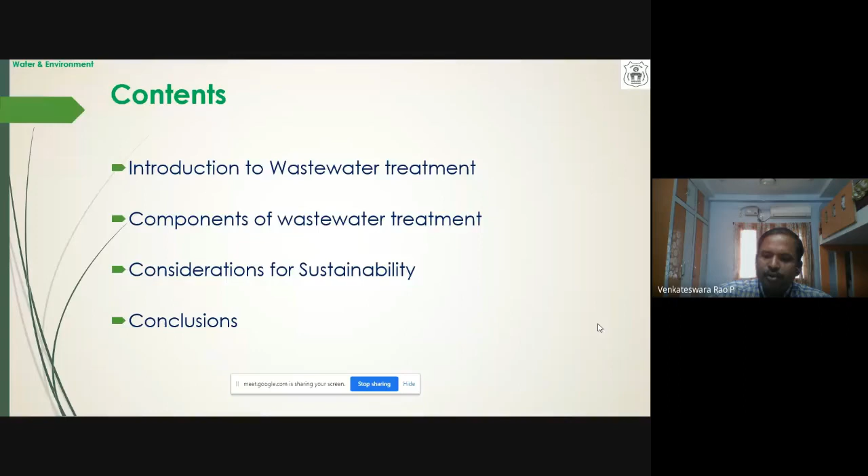Now, having these impurities in wastewater, our philosophy for wastewater treatment is to remove these various contaminants. They may be present in different phases - dissolved, suspended, or colloidal. In any form they can be present. These contaminants present in wastewater, which can also be called sewage,

are treated so as to produce an effluent and sludge. I am calling something effluent, and something sludge, because this wastewater, as I told you, has impurities. The fraction of impurities in fresh wastewater will be around 0.02%, approximately 99.9% being water.

99.9% is water, 0.1 to 0.01% will be solids. The impurities present in wastewater are to the tune of 0.1 to 0.01%. Because of this very small fraction present in wastewater, it poses a threat to the society and a threat to the environment if disposed of without imparting proper treatment.

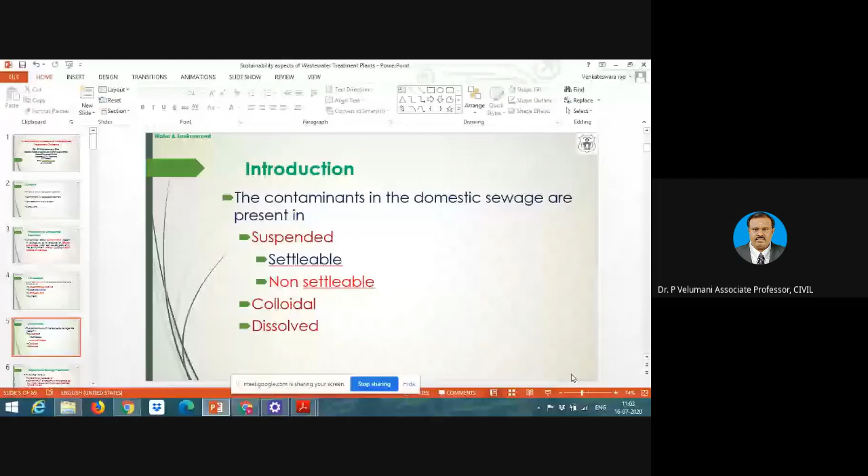Okay, Dr. Velumani, are you able to see now? Yes sir, yes sir, it's visible. Any disturbance in my voice? No sir, it was clear. Okay, good.

We want to use principles that follow nature's principles so they use less resources and become sustainable. Now, the fraction which cannot be removed even by using gravitational force is called non-settleable. This non-settleable fraction refers to colloidal or dissolved matter, which can also be removed using appropriate principles.

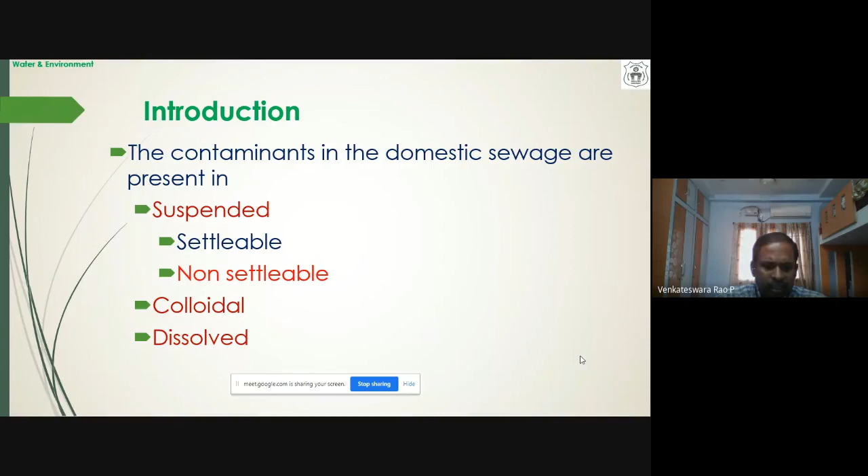I'll be talking about this. We discussed what are the different forms of impurities and in which phase they are present. Now, to remove these impurities, we'll be having a combination of unit operations and unit processes.

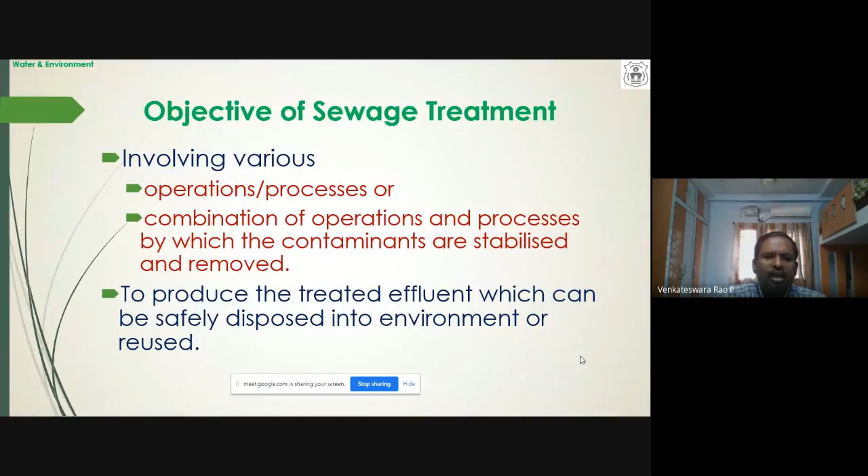I'm using a different word here, unit operations. The unit operations basically refer to the use of physical forces which can be used such that the targeted contaminant is removed. So whenever I talk about unit operation, it always refers to applying some sort of physical force, for example gravitational force, centrifugal force, or physical straining. These are the examples. Next is unit processes.

Unit processes means these can bring changes in chemical composition or biological composition. Chemical composition means, for example, there is biodegradable organic matter, which is a complex organic matter with long chain carbon molecules. These long chain carbon molecules are oxidized into CO2 plus H2O, plus a little nitrogen and some energy in the form of heat. These are the end products. If I get that conversion, I can call it a unit process.

In the process of converting the long chain carbon molecules into CO2, I also end up producing several microorganisms. That is called biosynthesis, also called microbial synthesis. There we are bringing change in the quantity of microorganisms, which is why it is called a biological unit process.

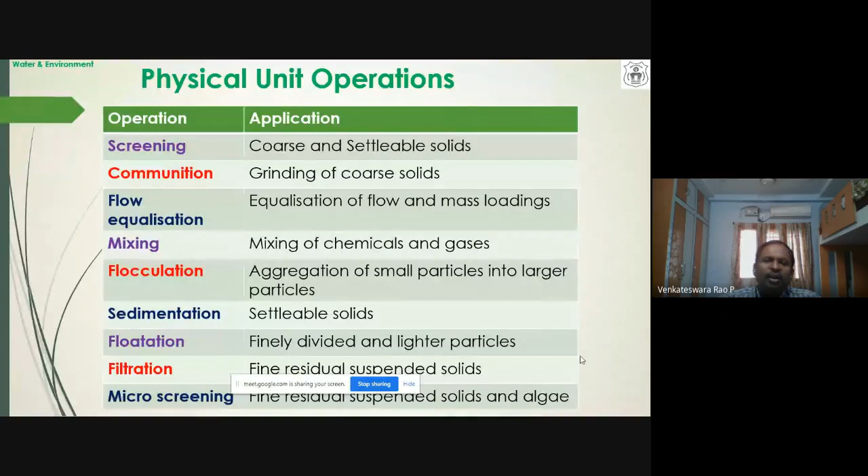Now coming to physical unit operations, there are different operations. Whatever I am discussing now does not mean that all processes or operations are used in all sewage treatment plants. Based on the investment, area available, type of wastewater, type of treated water quality required, the social acceptability, and the economical level of the people who are ready to pay taxes for the systems, we design such systems and accordingly make these components available.

Now coming to chemical unit processes, one is chemical precipitation, which you already know—removal of phosphorus or enhancement of suspended solids removal in primary sedimentation is an example of chemical precipitation. Gas transfer refers to addition and removal of gases.

Example, aeration in aeration tanks refers to gas transfer. Or even applying chlorine gas for disinfection refers to gas transfer.

Next is adsorption. This is for organics not removed by conventional, chemical, and biological methods. For example, volatile organic compounds cannot be removed even by a simple activated sludge process or secondary biological treatment systems, so we use adsorption systems as part of tertiary treatment to remove some of these type of chemicals.

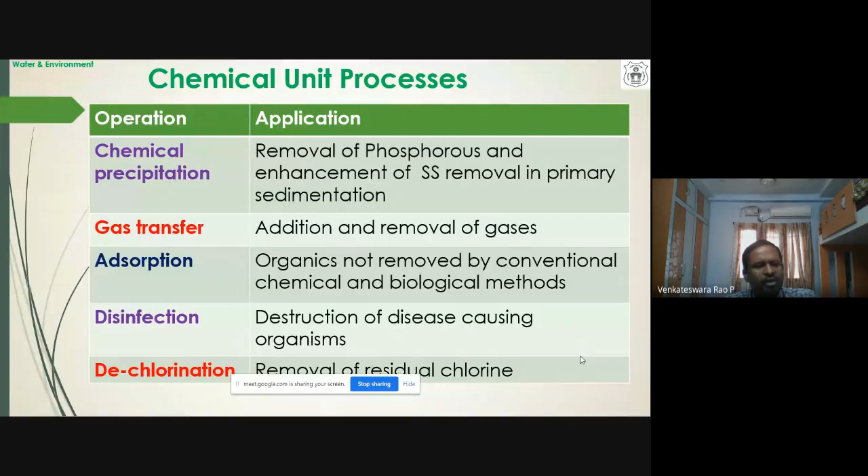Next is dechlorination, because during disinfection we apply chlorine, and to remove this excess chlorine—otherwise this excess chlorine causes other health effects—we want to remove it. This process is called dechlorination, which basically refers to removal of excess chlorine.

Now coming to various biological unit processes, we can classify them as aerobic, anaerobic, and anoxic processes based on the type of fundamental mechanism being used, which is also called the metabolic pathway. Metabolic pathway means the chain of chemical or biological reactions expected to remove the majority fraction of impurities from a given batch of wastewater.

So if oxygen supply is plentifully available, and the long chain carbon molecules, organic matter, is simply converted into CO2 plus H2O, we call it an aerobic system. This type of degradation happens in the presence of aerobic microorganisms, that's why these are called aerobic systems.

Aerobic systems, anaerobic systems, anoxic systems—these three are available. Aerobic and anaerobic systems are capable of doing the same job, but use two different types of microorganisms. Now we have a choice to use aerobic organisms or anaerobic organisms. Both systems have their own pros and cons.

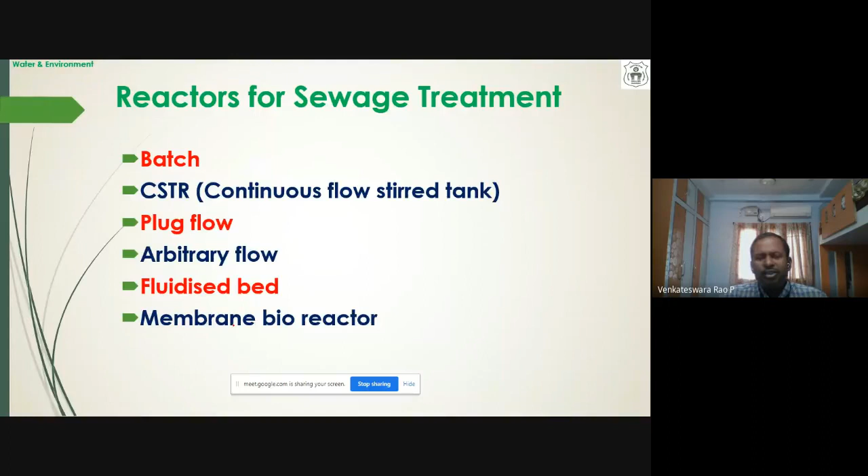So those types of reactors have different classes. We have batch reactor, CSTR, plug flow reactor, arbitrary flow reactor, fluidized bed reactor, and membrane bioreactor. I will not explain all these reactors in my talk right now, but some of these, wherever available, I will mention in my slides with figures, telling you the type of reactor and in which systems they are being used.

Now, having these reactors in my hand, if I want to remove these impurities, as I mentioned earlier, I will be doing this in a phase-wise manner. So the first phase is called preliminary treatment. Second phase is primary treatment, then secondary treatment, and tertiary treatment. Sometimes preliminary and primary together are called primary treatment.

The purpose of the preliminary and primary treatment is to remove the large suspended organic solids. Particularly, the preliminary treatment objective is to remove all floating matter as well as heavy settlable inorganic matter. If I am using only preliminary treatment specifically, that includes heavy settlable inorganic solids.

Someone may ask me, sir, what is the problem in removing all settlable solids together? When I talk about all settlable solids, that includes inorganic settlable, organic settlable, and inert settlable matter. Can somebody tell me what is the problem in removing the whole settlable solids at a time? If you devise a mechanism or a reactor such that all the settlable matter is removed together, is there any problem? Can somebody tell?

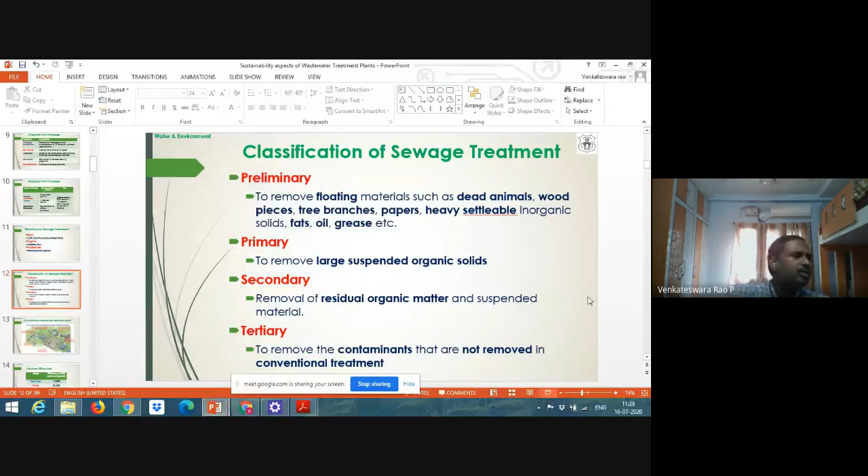Okay, now coming to this. So I told about preliminary and primary. Now coming to secondary. Preliminary and primary mostly use physical forces, which I can call physical unit operations, or simply unit operations.

Unit operations use very less energy or resources to remove impurities. Whatever I can easily remove, in a sewage treatment plant, I call quick wins, meaning whatever can be done immediately. That is called primary treatment. The primary or preliminary treatment refers to quick wins, things I can quickly remove using physical forces, which does not consume much resources.

Now, after this easy removal, the remaining matter in the wastewater is tough to remove using physical forces. The remaining organic matter, present in dissolved or colloidal phase, can be removed using secondary treatment. After secondary treatment, we also remove the bioflocs that is formed. That removal of bioflocs is also called secondary treatment.

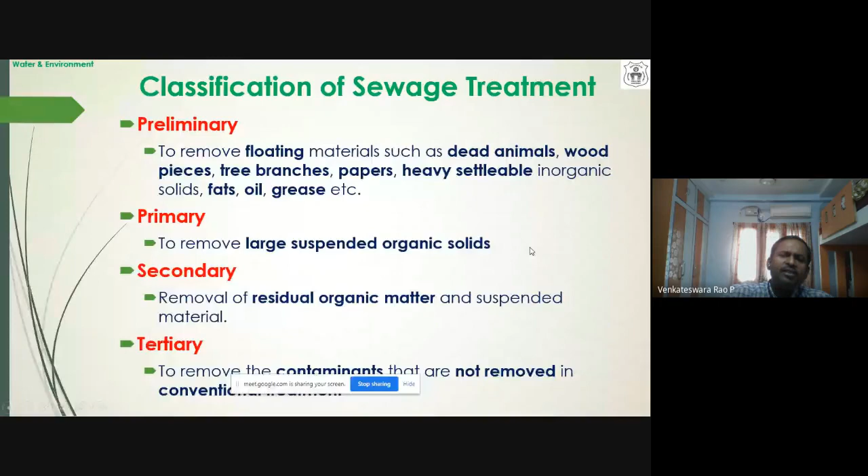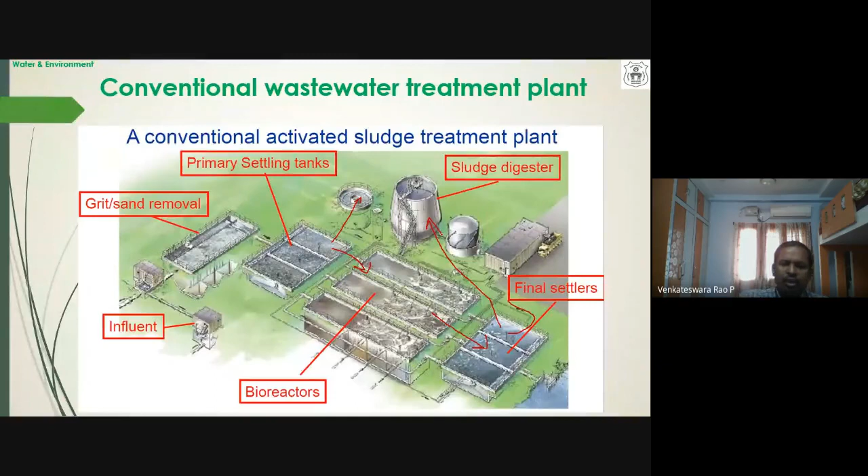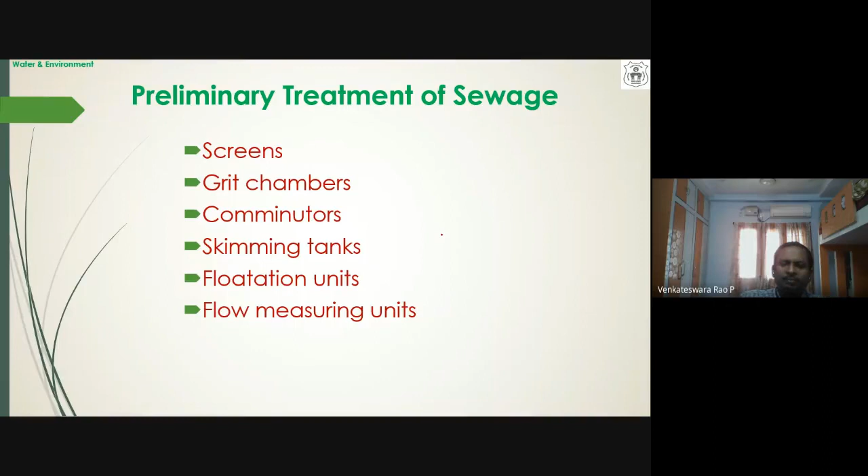The preliminary treatment of sewage has several options like screens, grit chamber, comminutor, skimming tanks, flotation units, and flow measurement units. Most of these I explained earlier. For preliminary treatment, floating materials which consume approximately 5 to 10% of BOD are removed using coarse and fine screens. Heavy settleable inorganic solids are removed using grit chambers, accounting for around 10 to 20%, and fats and greases can be removed using flotation skimming tanks. This may not be the case in most domestic treatment plants, but particularly for wastewater from kitchens, dining halls, or community halls, this applies.

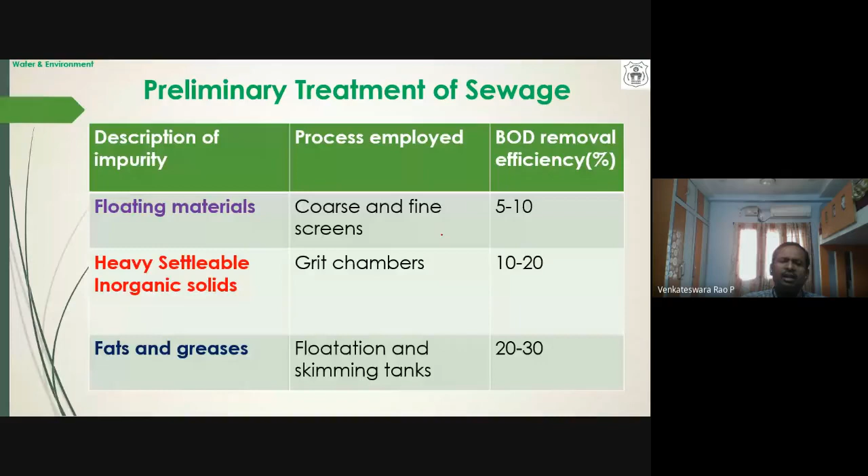Primary treatment of sewage is expected to remove large suspended organic matter, which we can do using aerobic or anaerobic systems, and plain sedimentation tanks. For example, septic tanks and Imhoff tanks have only one system, but conventional municipal wastewater treatment units have several unit operations and processes happening in different units. Septic tanks and Imhoff tanks don't have many units, but are very simple constructions capable of removing various impurities at different stages within one physical unit. That's why these are also mentioned here.

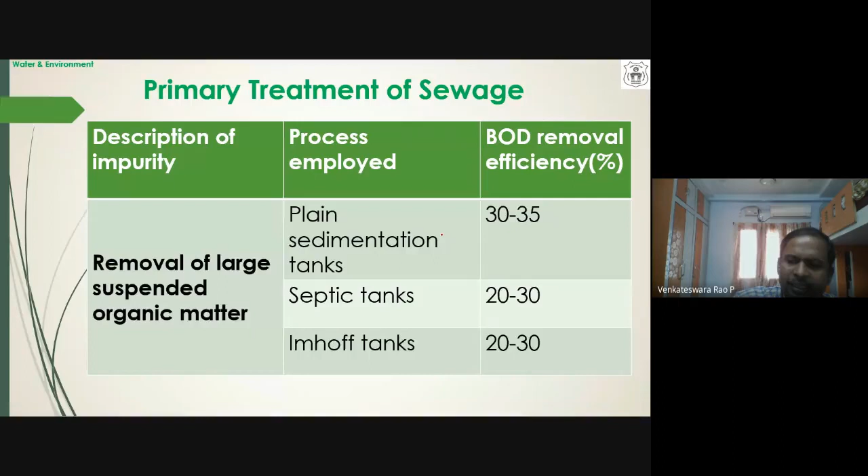Secondary treatment of sewage is expected to remove fine suspended solids and dissolved organic matter that is biodegradable in nature. Majorly we employ either the activated sludge process, and trickling filter as an older system, but now it is almost obsolete - nobody uses it because of operational problems and ponding problems. People are going for the activated sludge process or oxidation ponds, often used in combination. There are many modifications to the activated sludge process, which I will discuss in my next lecture.

Tertiary treatment of sewage includes chemical clarification, filtration, adsorption, disinfection, nitrogen removal, phosphorus removal, and demineralization. All these processes are self-explanatory.

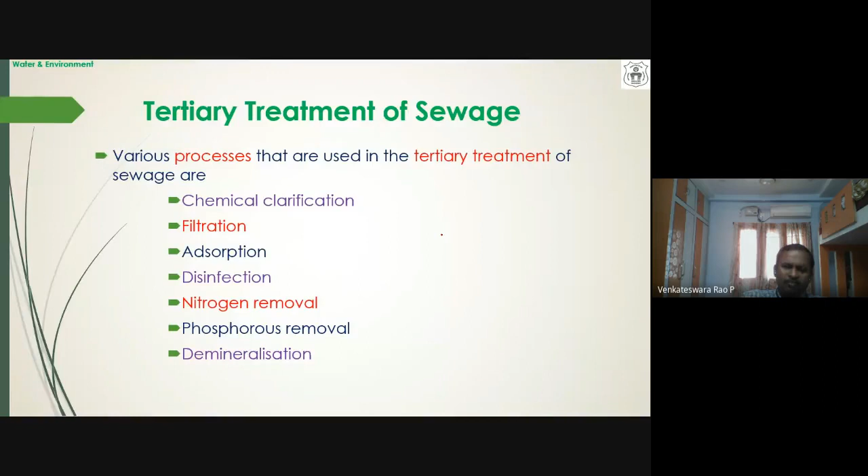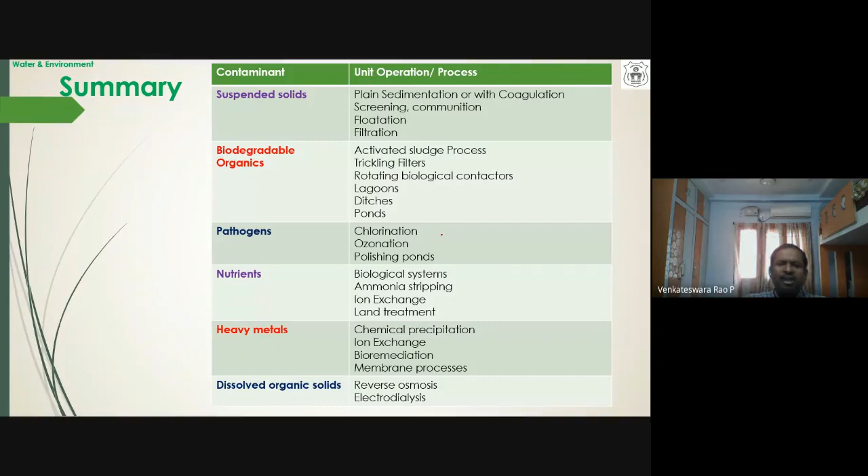Now going back to this summary sheet, which talks about impurities and the possibilities - the different methods and mechanisms available to remove these contaminants. For example, for suspended solids, I have four choices: plain sedimentation with or without coagulation, screening, comminution, flotation, or filtration. How many of them I use depends on the range and scale of impurities, as well as money available, capital cost, operational cost, total layout of the treatment plant, area available, and the required treated water quality. Accordingly, I use either one or a combination of these units to remove these impurities.

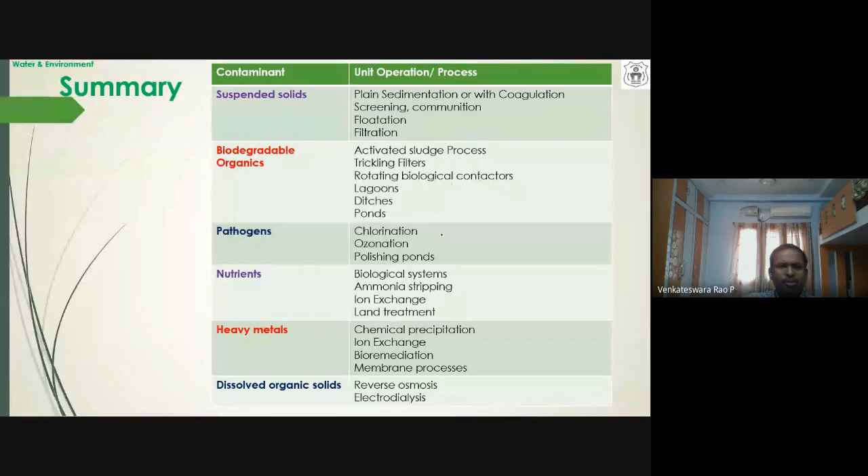That is the summary of my first part of the lecture. Now I'll stop here for a while for any questions you have. If you don't have any questions, we'll move to the next part. Any questions so far?

Audience, any questions from my first part? As I took a lot of time explaining minute details in the beginning, for the rest of the talk I'll go a little faster. I won't repeat most things, but I'll show figures of the different unit operations and processes, their usage, and sustainability concepts in my subsequent lecture. Any questions so far?

Hello sir, please - regarding flow equalization, can you please explain? Yes, what is your problem regarding flow equalization? What is your question under the physical unit operations, the flow equalization?

Yeah, so it's intended basically for this reason: if you look at how sewage is produced in a day, it is not uniform. Particularly between morning 6 to 9, we produce the largest amount of sewage - those 3 hours account for the maximum production. In the evening too, like 6 to 8, we produce maximum sewage. But our sewage treatment plant is generally designed for 24-hour operation. So if we allow the entire sewage to directly reach the plant without any cushioning, at certain times the units are subjected to high flow, causing some units to not function properly. So we need a mechanism where the flow is stored and pumped to the remaining units in a constant manner. That is why we need flow equalization. Hope I answered your question.

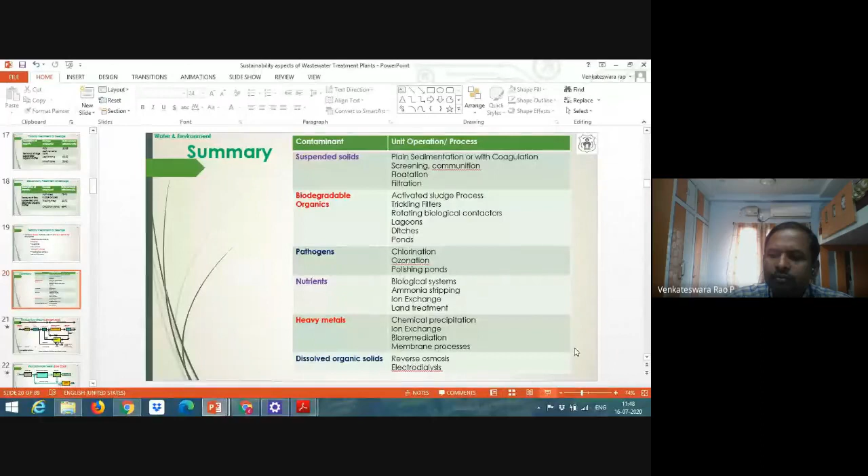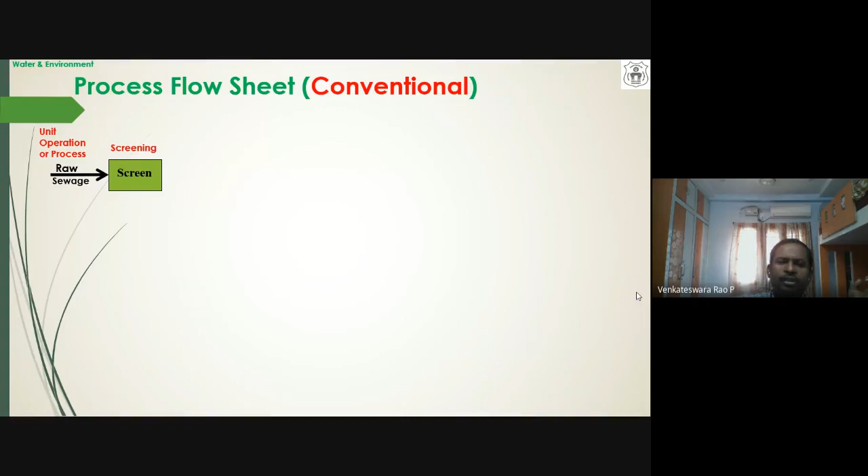Now I have shown you earlier the typical layout. I will be showing the same layout again, revisiting it, showing the different unit operations and processes. What is possible, say for example, as I am talking to you, most of the participants are from Bengaluru. Say you want to design a system for Bengaluru, or for Tumkur, because I have some affinity with Bengaluru since I worked there in 2003-2004, two years, at Ramaiah College, MSRIT. So if you want to design for Tumkur, or maybe Shahabad, Yadgiri, some small towns, or even a small village with 20,000 or 10,000 population, if you want to design systems which are possible and feasible, and how to do it...

Okay, so if you look at my screen now, what I am mentioning at the top here - these are called unit operations or processes. So those I've shown here in the box, as how sewage moves from one unit to another unit. Now going forward...

So sewage enters from raw sewage to screens. Here we remove large floating bodies, then it enters into grit chamber, where I remove heavy suspended settleable matter, grit matter, and then it will remove lighter organic material in the form of dissolved and colloidal matter. Now I get the secondary clarifier, which will remove the bioflocs produced in the reactor. Now the clear effluent is called treated sewage, which I will subject to disinfection and then release into water bodies. Now the sludge obtained from the secondary clarifier is taken and given to the biological reactor. Why? Because the sludge obtained in the secondary clarifier is nothing but active microorganisms, or trained microorganisms.

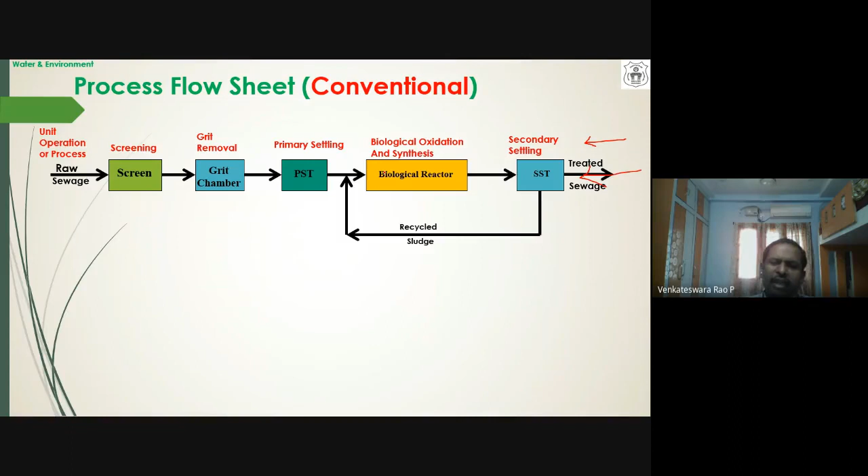So these microorganisms already have enough training to remove the carbonaceous organic matter. So we don't want to simply lose them. We want to increase their population in the biological reactor, which refers to M. Actually, there is something called the F by M ratio - F means food, M means microorganisms. Food means the colloidal or dissolved biodegradable organic matter, whereas the microorganisms present in the reactor refers to M. So for a given quantity of food, if I maintain enough microorganisms, my work can be done much quicker. That's why we recycle the sludge.

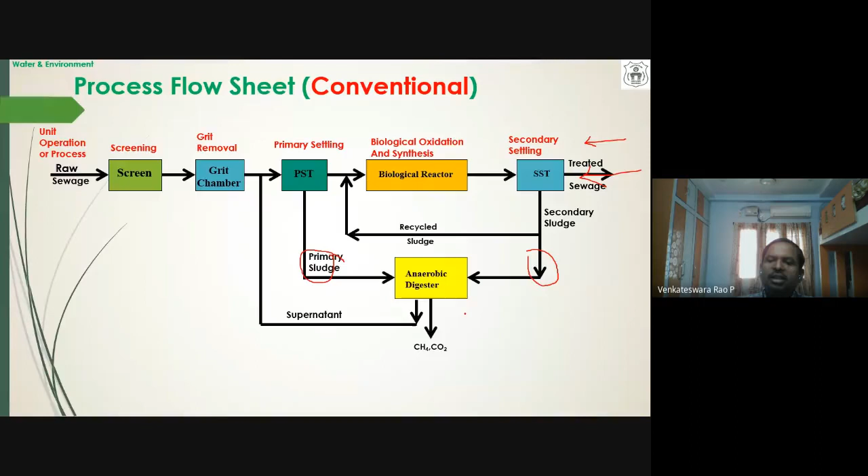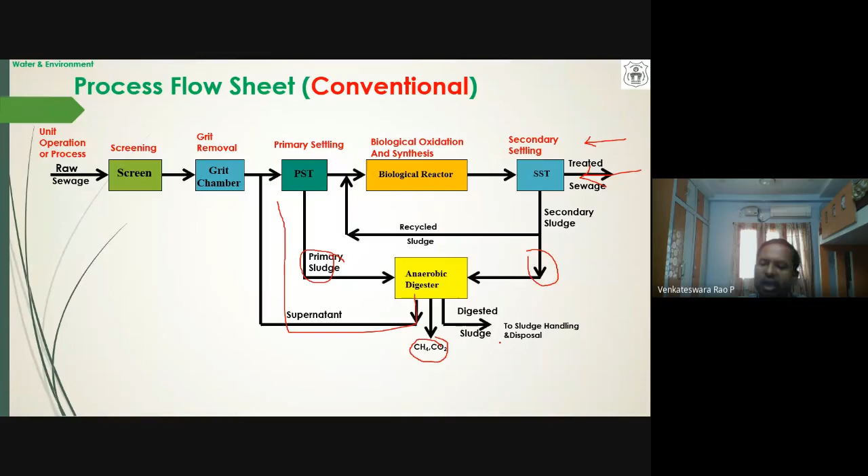And after recycling, a fraction will be excess. So the excess sludge, whatever is clarified, is taken to the anaerobic digester, and sludge from the primary sedimentation tank is also taken to the anaerobic digester. The purpose of this anaerobic digester is to fix the carbon content present, and over a period of time this digester produces methane plus CO2, which is called biogas. After getting energy, once the digestion time is over, I separate the liquid and solids - the liquid is taken back to the beginning of the treatment plant, whereas the solids or digested sludge is taken for dewatering, and finally after dewatering we can dry it and use it as soil manure. So up till here we call it primary treatment, and after that it is called secondary treatment.

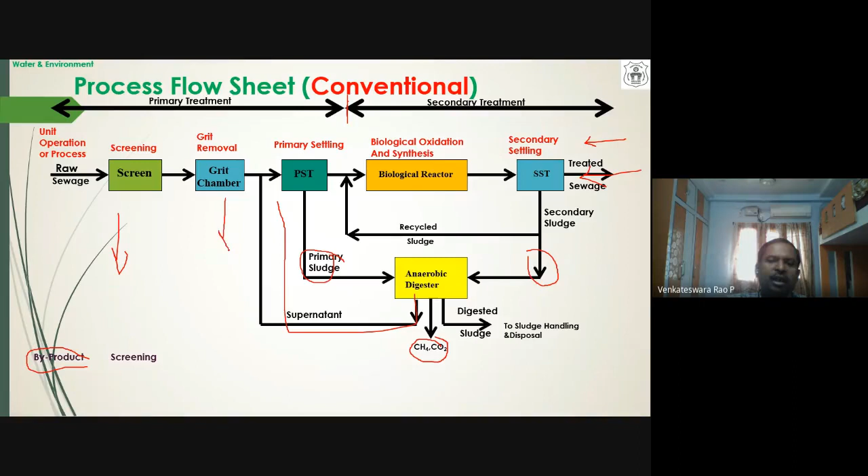Now coming to this process, if I look at the byproducts produced from each stage - from the screen I get screenings, from the grit chamber I get grits, from the primary sedimentation tank I get primary sludge, and from the secondary sedimentation tank I get secondary sludge. So these are my captions. This is the process flow sheet of a conventional sewage treatment plant. Hope it is clear. Any questions here?

So this is called a conventional sewage treatment plant. This is a typical system which can be applied in any major urban agglomeration. The moment we move from urban to semi-urban, where people's paying capacity is less, this is not the system.

If people's paying capacity is less, or land is available cheaper, or energy is not continuously available—because these systems' performance depends mostly on a biological reactor where we have to supply 24 hours of oxygen, meaning 24 hours of electricity, which was once a dream. In olden days, even 10-20 years back, even Indian metros didn't have the freedom of 24 hours power. Now we are blessed with continuous power.

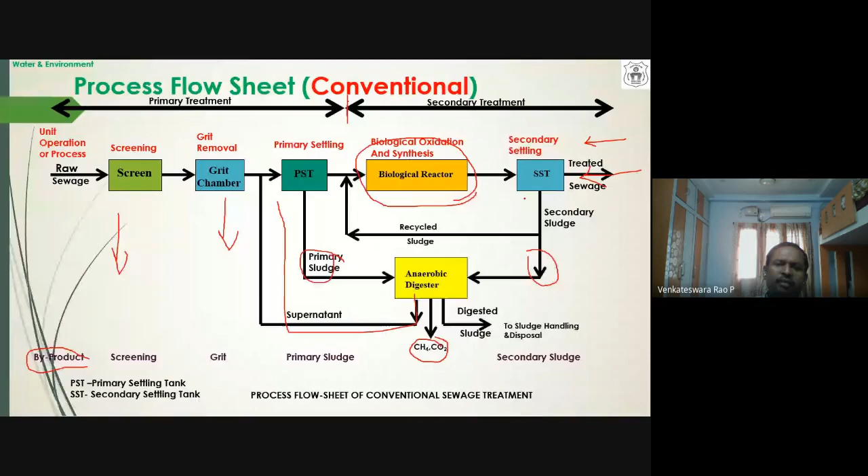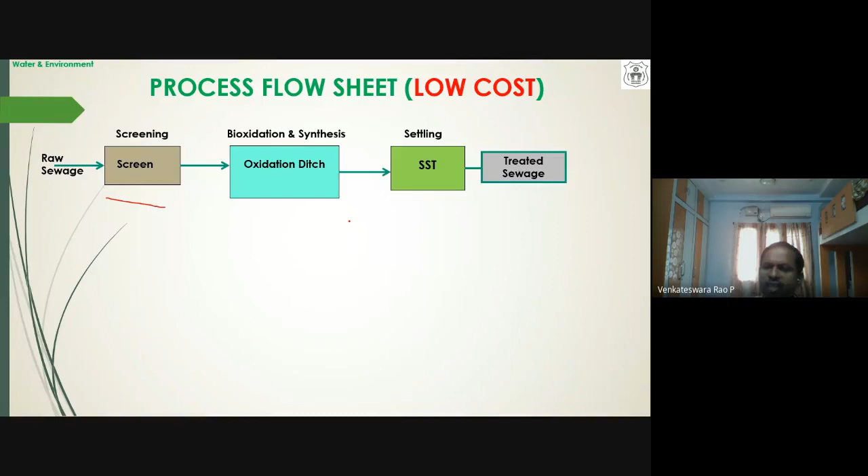But in the absence of continuous power, we have to think of alternate solutions. These conventional systems, now moving to low cost systems—everything is the same, but instead of so much pre-treatment, I'll have simply screens followed by something called an oxidation ditch, and then treated sewage. So everything else is the same; this is called low cost treatment systems. What is an oxidation ditch, how does it look? I'll show a figure later, I have an excellent figure.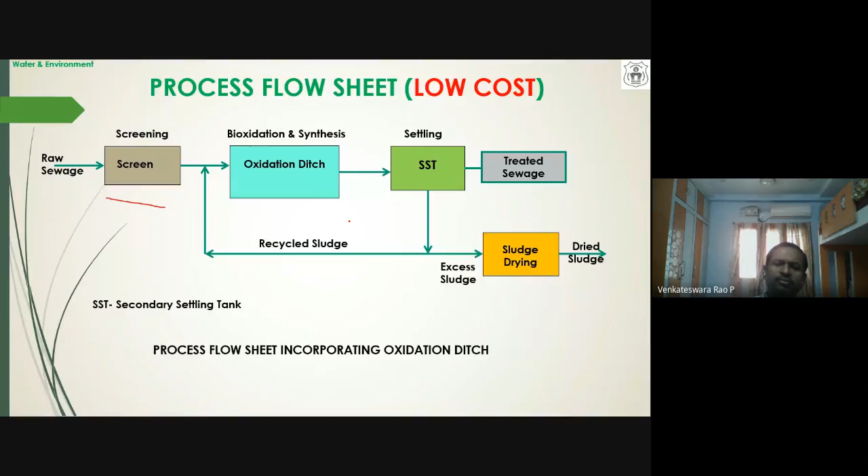Another option, if we don't want an oxidation ditch, we can go for aerated lagoons—I have a figure for that too, I'll show you. I can also have a waste stabilization pond doing the same job. Now you may ask, what's the difference between an aerated lagoon and a waste stabilization pond? An aerated lagoon has an additional aeration device attached to a pond. If that aeration device is removed, such a system is called a waste stabilization pond.

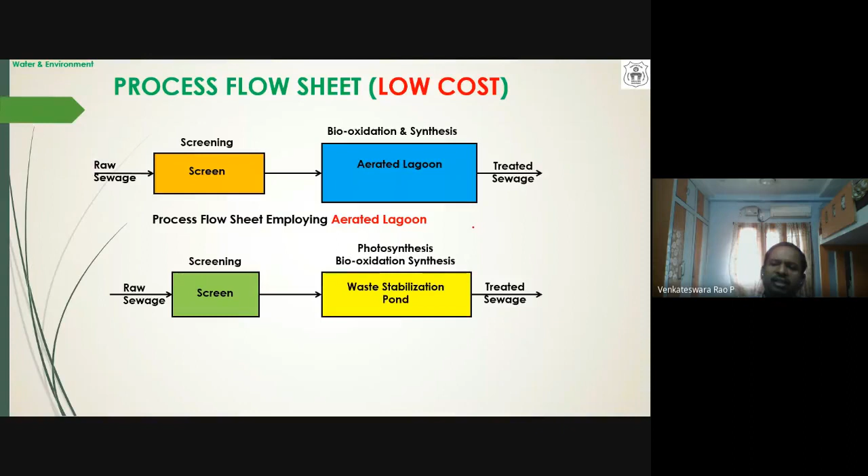This waste stabilization pond itself has different types: aerobic ponds, anoxic ponds, anaerobic ponds. Now all these methods so far, low cost or conventional, work on the principle of aerobic mechanisms. Now if I want to talk about anaerobic systems...

These include anaerobic filters, anaerobic rotating biological contactors, fluidized submerged bed media anaerobic contactors, upflow anaerobic sludge blanket reactors—these are the popular anaerobic reactors. One good thing about anaerobic reactors is they are capable of generating energy, meaning they convert long carbon chains into CH4 plus CO2, called biogas, which can be used for various purposes.

Whereas aerobic systems don't yield usable energy—they also produce energy, but in the form of heat, which we are not able to recover. Very little heat is produced and we cannot recover it. So aerobic systems require less footprint area, while anaerobic systems require more footprint area. Aerobic systems require more additional energy, whereas anaerobic systems require less additional energy.

So basically anaerobic systems require very little energy and are capable of producing more energy, but the problem is they require more capital cost—huge reactors are needed because residence time is much higher. Whereas aerobic systems, since we use more energy to supply oxygen, the treatment process is much faster, so it requires less footprint. As we accelerate the process, aerobic systems also produce large amounts of sludge, whereas anaerobic systems, being much slower, produce less sludge. So these are the differences between aerobic and anaerobic systems.

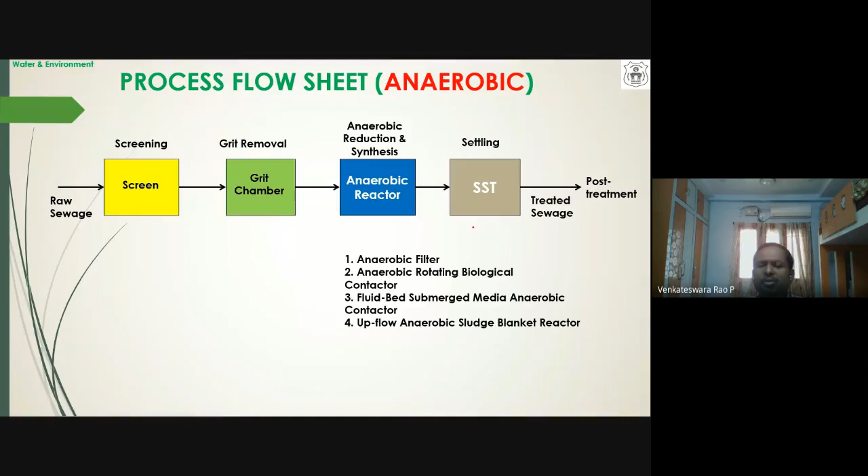Now coming to expected efficiencies—this is self-explanatory, you can just go through it. The types and classification.

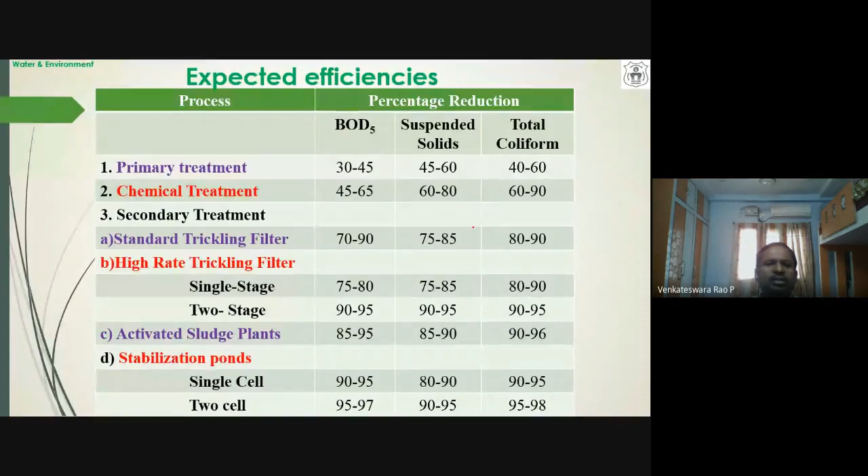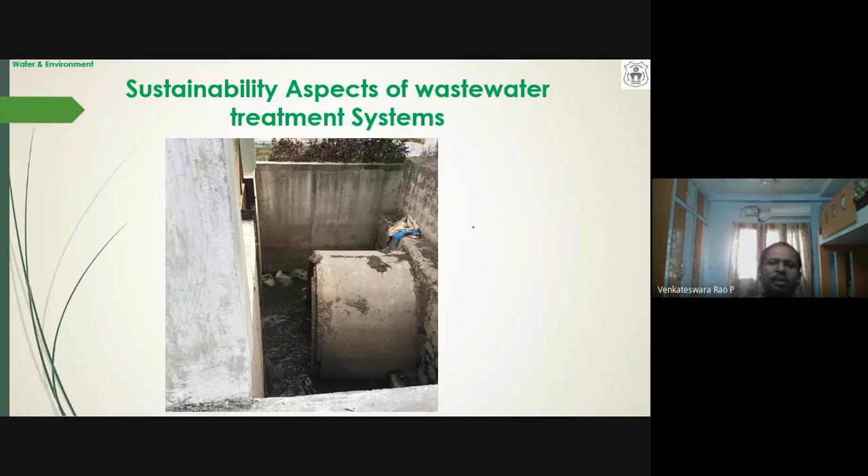Now I am talking about sustainability, having understood the fundamentals of wastewater treatment so far. Let us look at what are the different sustainability aspects of these wastewater treatment systems, whether aerobic or anaerobic. How do you make the system sustainable? What are the different factors one needs to consider? Of course, the essence—when I say sustainability here in wastewater treatment—refers to building blocks to form a structure.

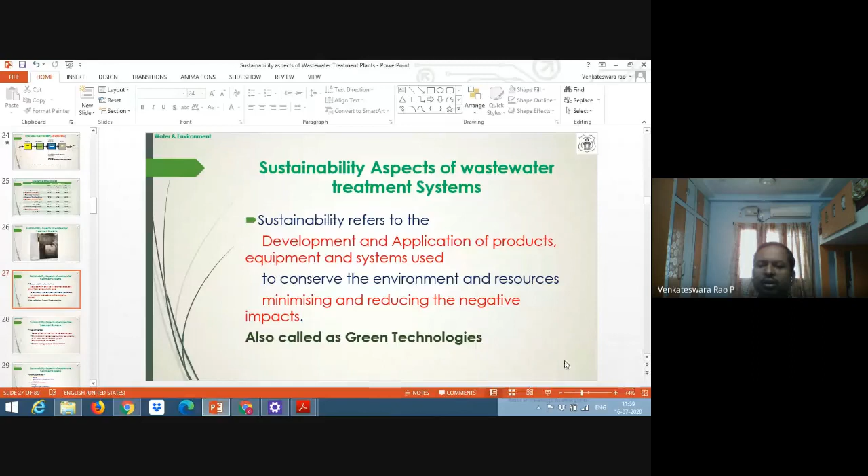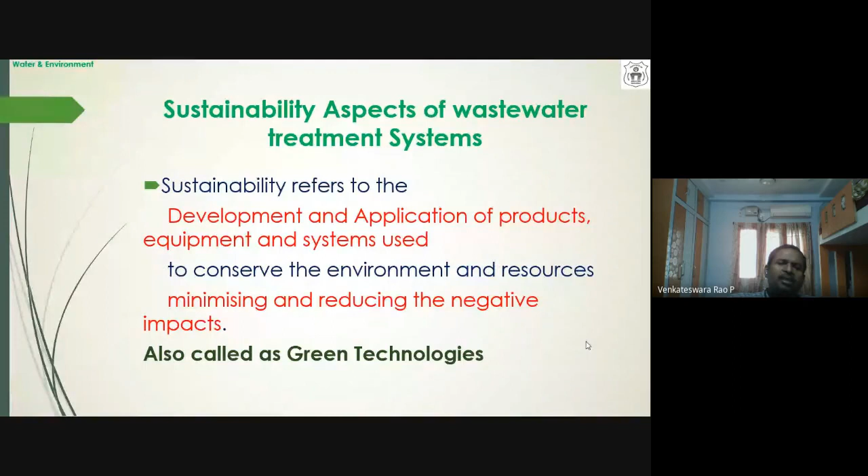So sustainability refers to development and application of products, equipment and systems such that we conserve the environment and resources, minimizing and reducing negative impacts—also called green technologies. Now let us look at what factors we consider to make a treatment system sustainable. These are the different factors, which I can call indicators. One is the economic indicator, like how much capital cost it requires for a system to be implemented.

What are the operation and maintenance costs and what is the user cost?

Coming to environmental indicators, how much energy does the system require, and what is the removal efficiency of these various impurities present in the wastewater, and what is the reuse potential of treated water generated from this treatment system. As part of societal indicators, what is the cultural acceptance, whether it is capable of providing new job opportunities, and what is this treatment system's capability in improving the local environment.

All these factors are called sustainability indicators, based on which we can classify existing systems into a ranking, and then choose an appropriate system with reference to a particular area while deciding what type of treatment layout can be used. So what are the different advantages?

By following sustainability, what we really gain is less effluent to be discharged, and less hazardous effluent in terms of both quantity and quality. These processes are environmentally friendly because of the environmental indicators: consuming less energy, less resources, causing less environmental nuisance, and retaining high quality of environment.

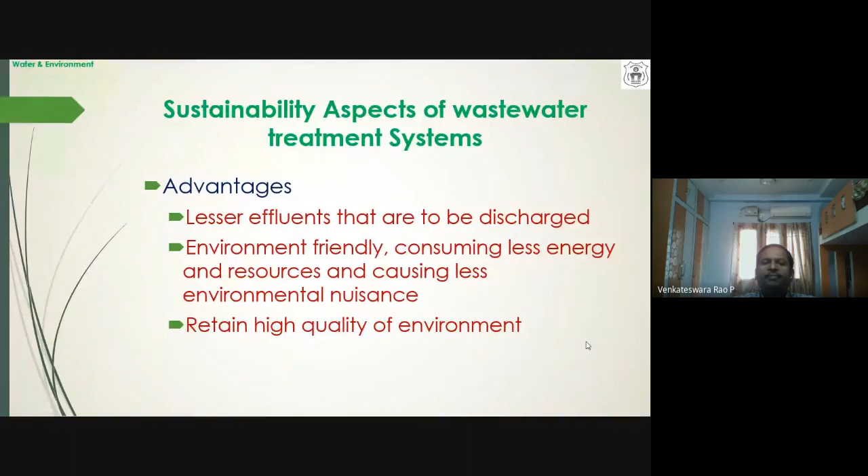Today you must have seen that because of COVID, when there was lockdown, natural systems were healing everywhere across the globe, particularly with the reduction of greenhouse gases and so on.

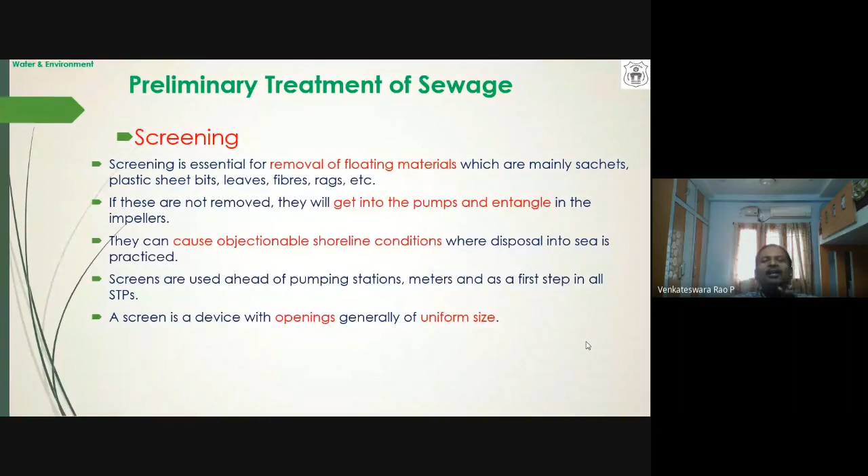Now coming to preliminary treatment of sewage, I am having a screening which I already explained. Now let me show you the different types of screens.

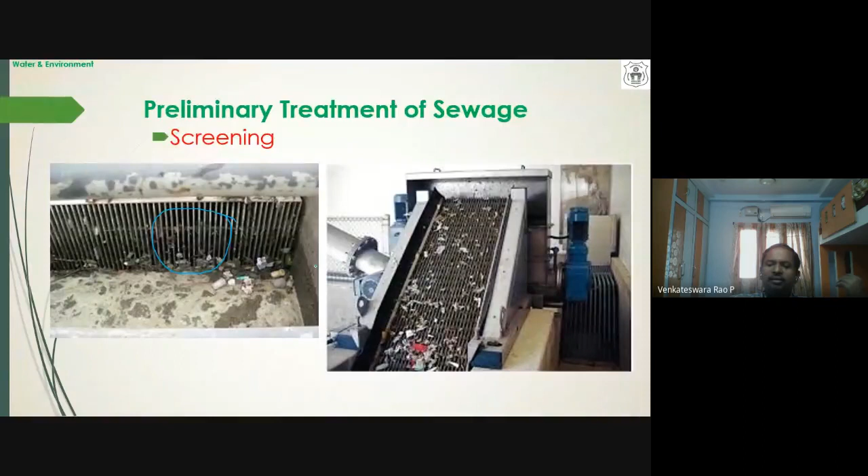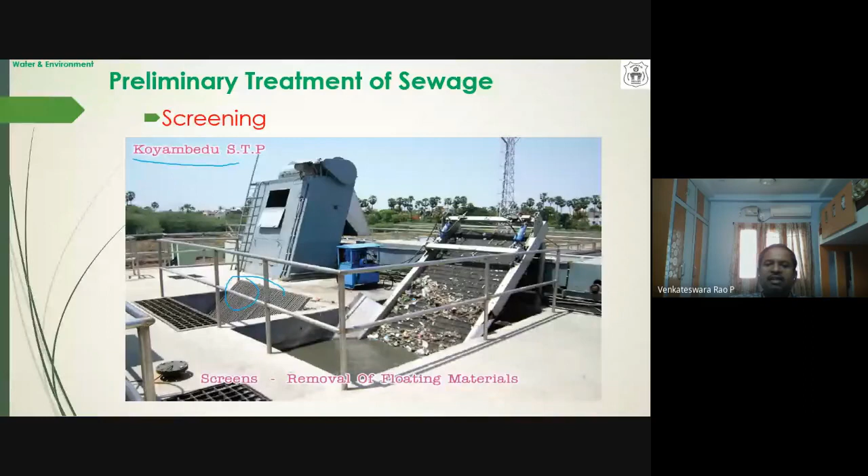This is a photo I took from a Tamil Nadu, Chennai plant, Koyambedu sewage treatment plant, a motorized plant. This is a coarse screen, whereas this is a fine screen, a motorized screen.

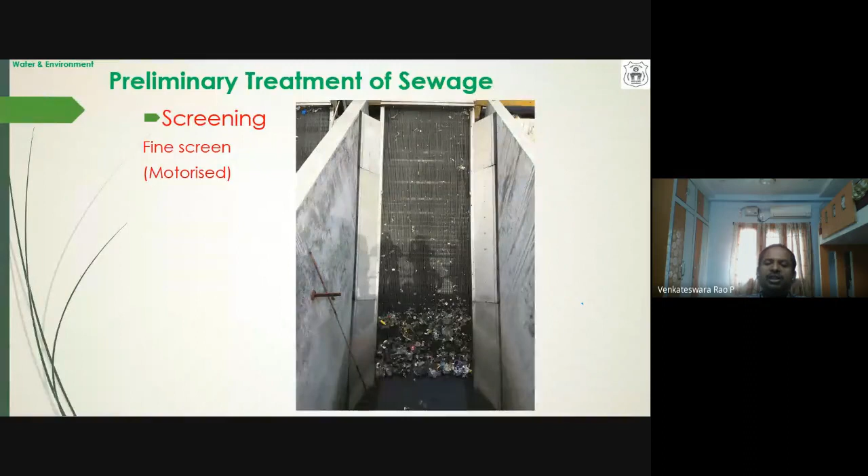This is a mechanical fine screen, a motorized fine screen which moves automatically. This is a manual fine screen, where one can remove the impurities and keep them here. From here it will be lifted and loaded to the garage.

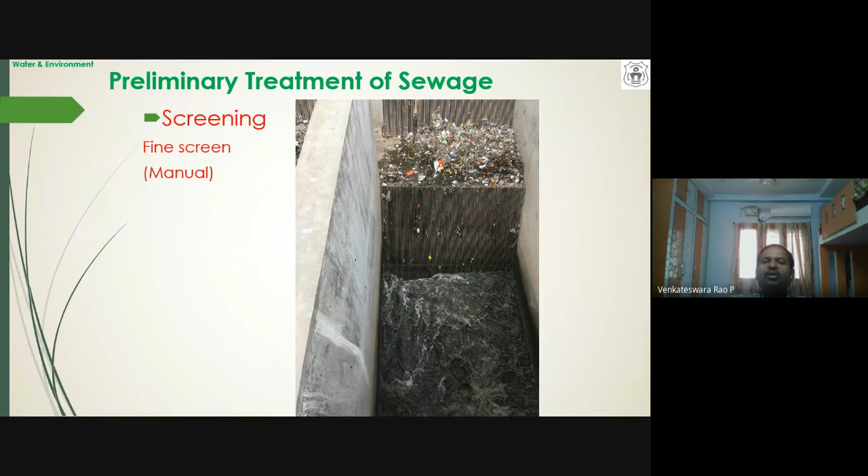And if anybody wants to design a screen, these are the different stages and steps in the design of the screen.

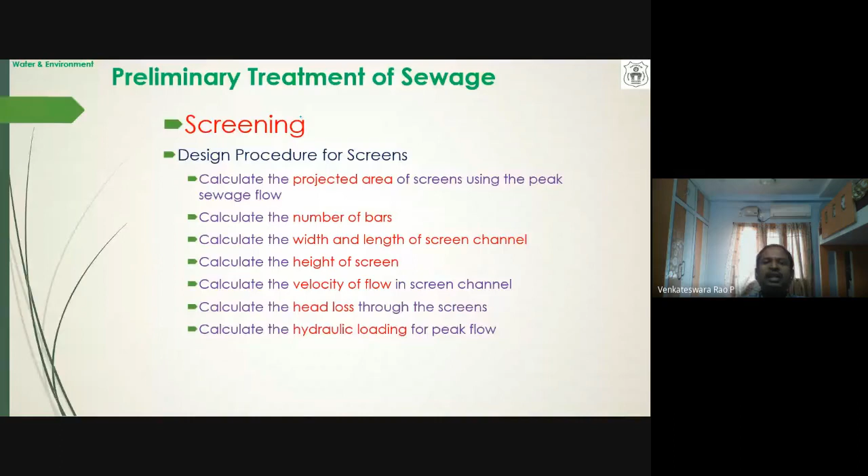And we have grit removal systems. Grit removal is basically for removal of heavy settleable suspended particles, inert particles, because this grit can interfere with the moving parts of the treatment plant.

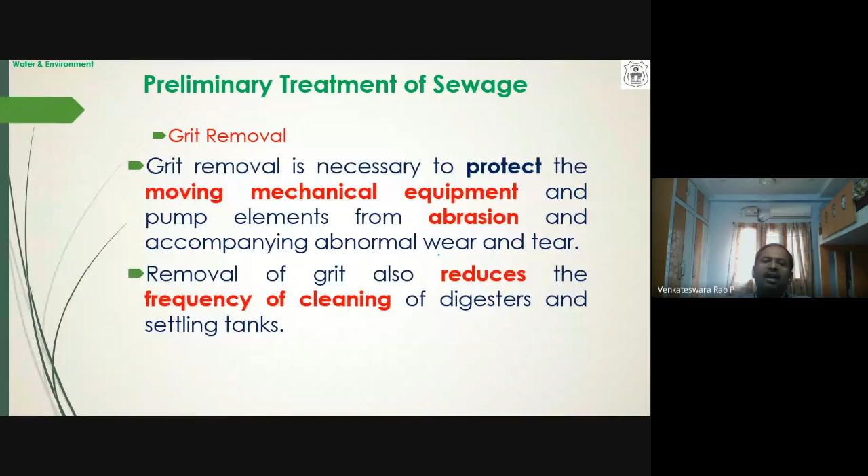These are the various design considerations, and this is the design procedure for this grit chamber.

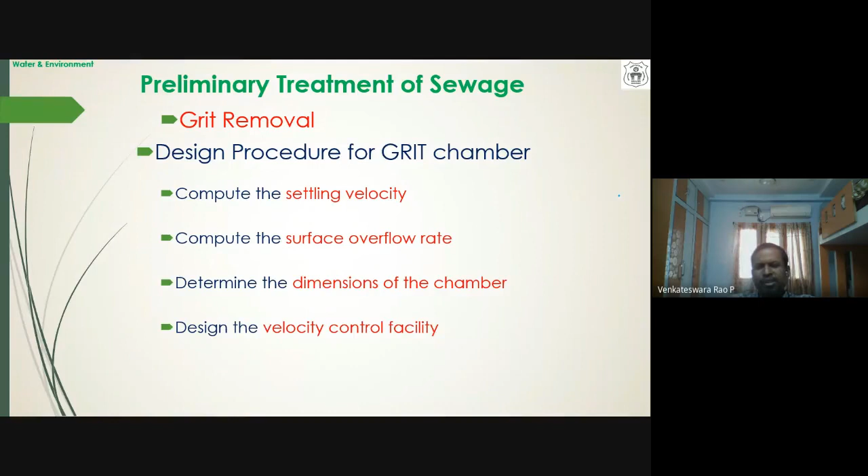These are called velocity control devices, which are fixed to the end of the grit chamber. Whatever we are fitting to the end, this is called a velocity control device, for velocity control and flow measurement.

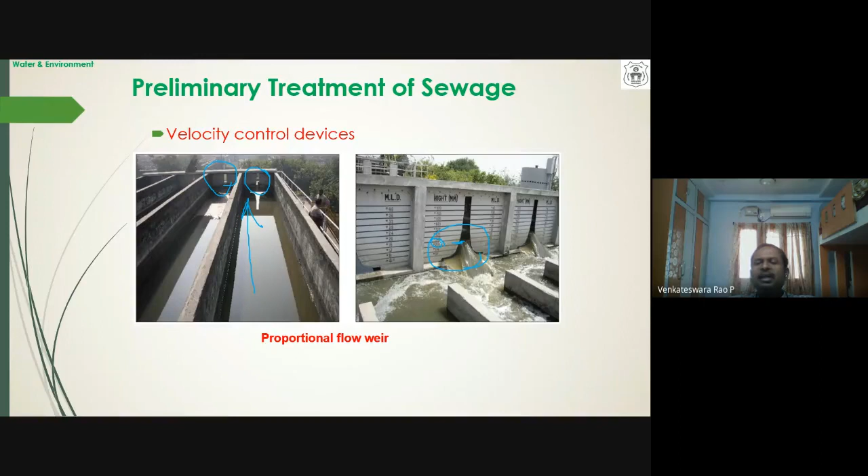You can see the outlet, but when the sewage comes, we can see this marking, which will tell what the flow is at that particular time. So timely we can record how much sewage is entering the treatment plant. This is another way of recording the sewage using a proportional flow measurement.

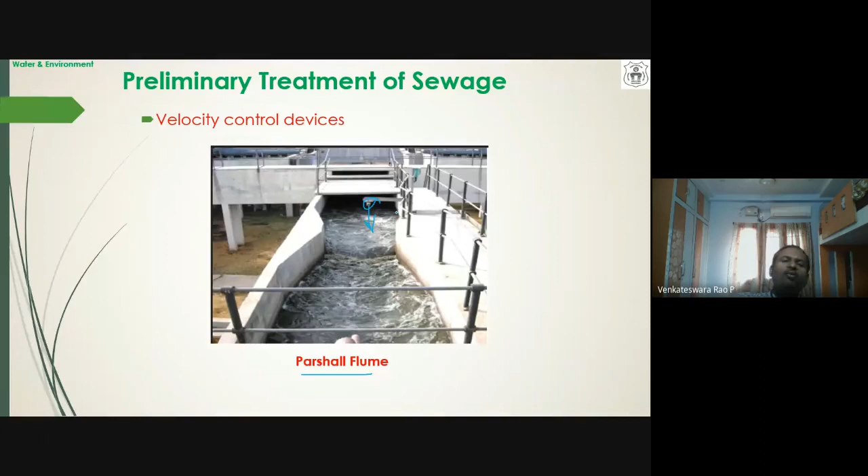So here I have an online sensor, which will keep on taking the measurements. It will always measure the height of sewage in a Parshall flume. As we know the head and the width at the throat level, we can calibrate that and understand how much sewage flow is entering into the plant.

So this flow equation, as I mentioned here, controls the hydraulic velocity flow rate into the wastewater treatment system.

And settling, basically the primary clarifier is to remove the organic load on the secondary treatment, which removes all the lighter organic material. These are the design considerations, and this is the design procedure.

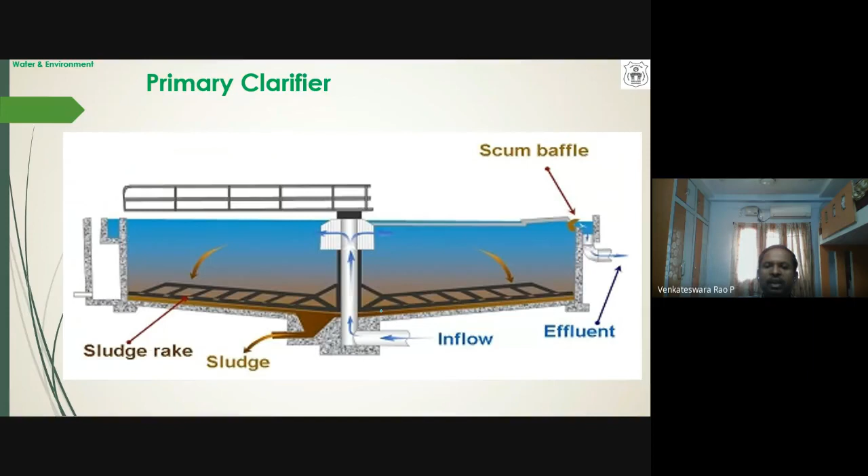And this is a typical view of the primary clarifier. It will have a raking mechanism towards the bottom, capable of removing settled solids to the bottom of the reactor, which can be taken to a sludge hopper and then for sludge management. This is the second configuration of the primary clarifier, how it looks like.

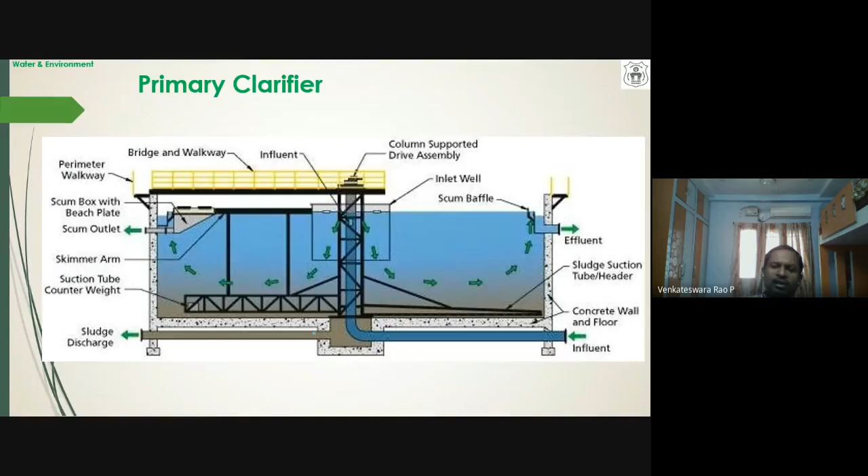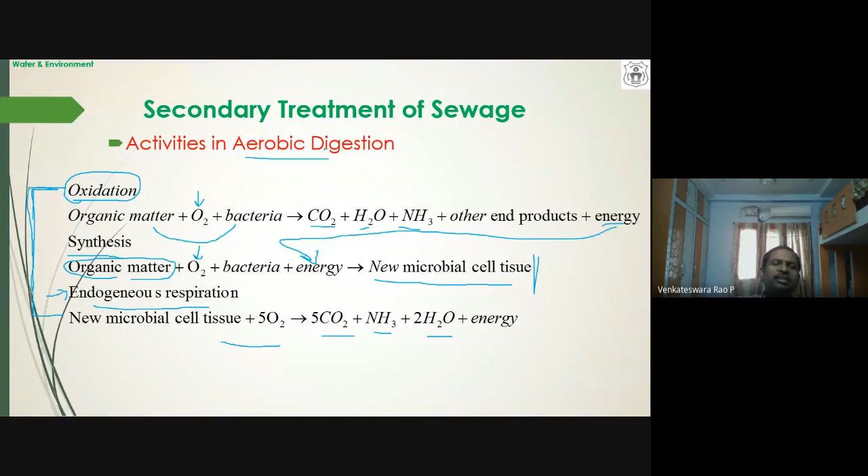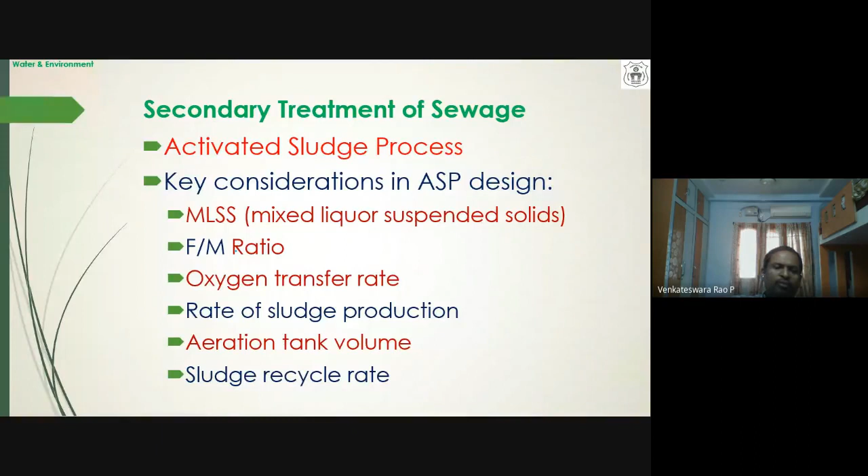These are various modifications to the activated sludge process. Instead of giving aeration the same throughout the reactor, we can give it in different phases. That is called tapered aeration, step aeration, and contact stabilization. Contact stabilization means before aerating, mix the entire wastewater along with the rich biosolids.

Just leave it for some time - that itself will remove a lot of organic matter without even supplying oxygen. That is called contact stabilization, which removes organic matter without using oxygen. That is a saving of energy.

Extended aeration is basically used if you don't want any tertiary treatment. You can use extended aeration because in a typical ASP you have an aeration period of 4 to 6 hours, whereas extended aeration can go to 12 to 18 hours for removing some of the slowly degrading material.

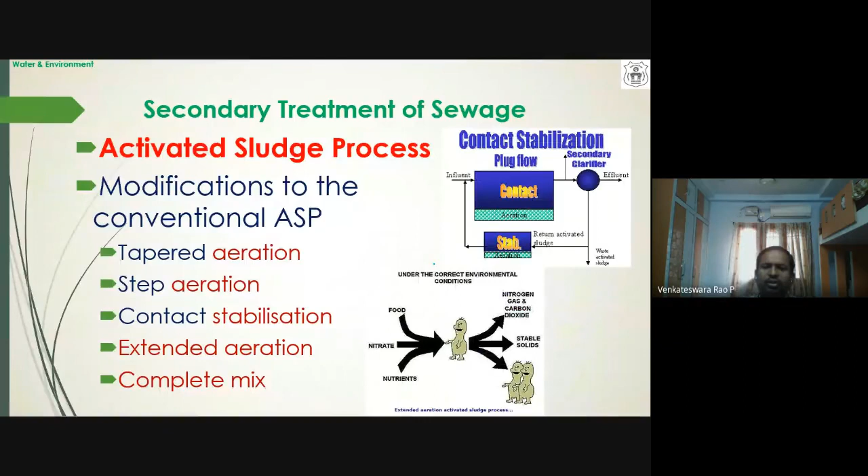Next, complete mixed reactors is an improvement of ASP. These are some figures I showed you, like contact stabilization, how it works, and all these things.

This is a modification of ASP - the oxidation ditch, as I told you earlier. The oxidation ditch has a 3 to 4 meter deep tank. These annular areas are called rotors. When you operate these rotors, sewage will be moving in one direction.

These not only remove the carbonaceous organic matter, but oxidation ditches are also capable of removing nutrients - nitrogenous organic matter is also capable of being removed. This is an improved version of ASP, but it requires a larger footprint area.

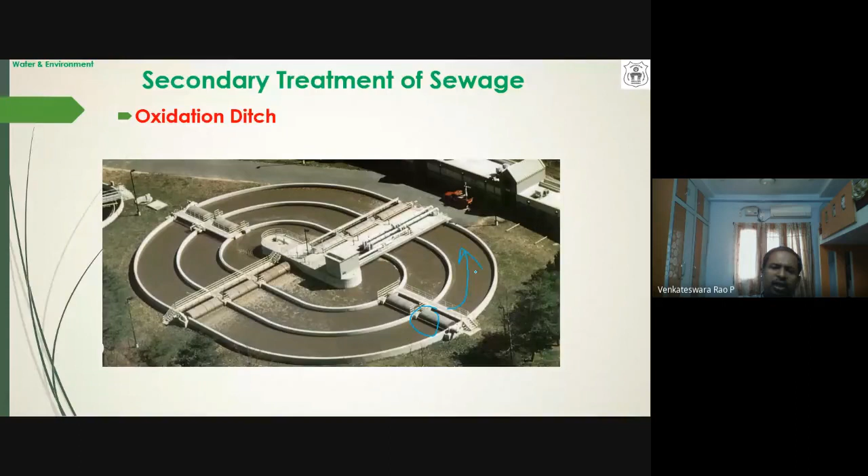Next is the trickling filter. Here the sewage is sprinkled on top of a granular media filter, where the media is allowed to aerate through natural air, or sometimes if natural air is not possible, we can pump the air - this is artificial air. By giving more air here, when sewage moves downwards, it interacts and settles onto the media, forming a slime layer, and using that layer, it fixes the organic matter present in the wastewater. That's how the trickling filter works.

These are oxidation ponds, also called waste stabilization ponds. They can be labeled as aerobic, anoxic, or anaerobic. If the depth is less than 1 meter, we call it an aerobic pond. Up to 1.5 meters, we call it anoxic - the 1 to 1.5 zone is anoxic. If it is more than 1.5 to 2 meters, we call it an anaerobic pond. So the top layer acts as aerobic, 1 to 1.5 acts as anoxic, and after 1.5 it acts as anaerobic.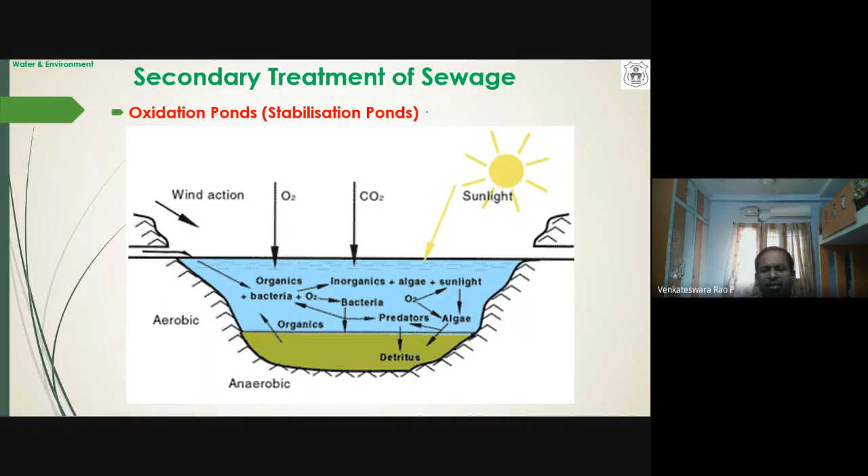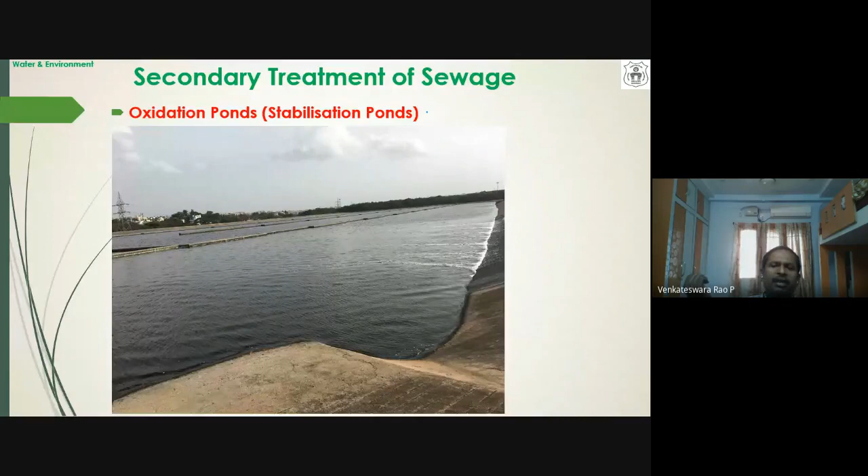These are oxidation ponds, a real-time photograph taken from a Hyderabad Amberpet treatment plant, where one can see how neatly it is maintained.

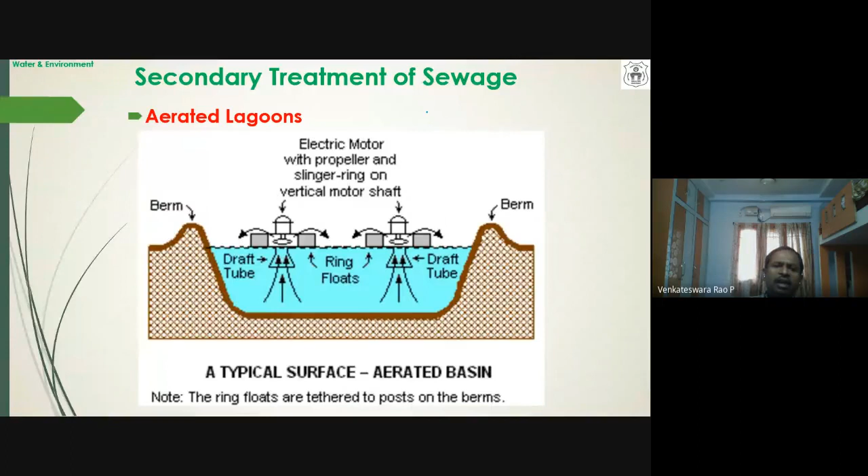The next configuration addresses a common concern: if somebody wants to treat wastewater for a community, like an apartment with 20 or 100 houses, then all the systems mentioned earlier may not be practically possible, because those cannot be practiced as decentralized options. Those are all centralized options.

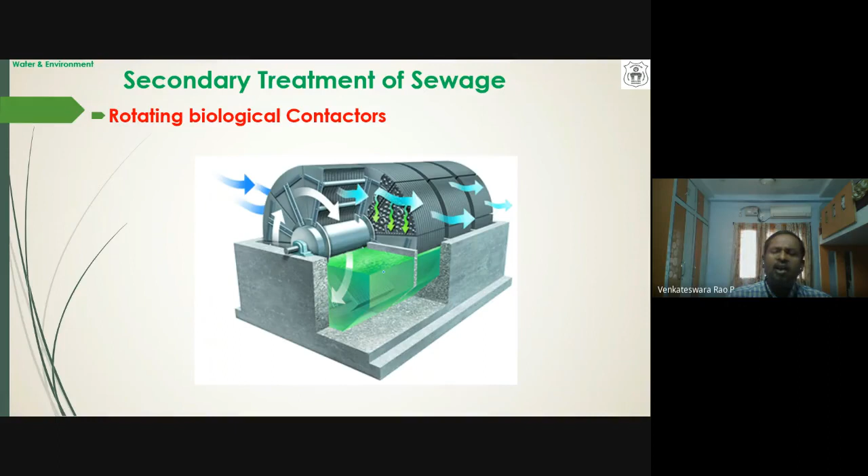But rotating biological contactor is a decentralized option. We can install this type of system for an apartment, a new type of living standard, where instead of depending on municipality for fresh water for secondary purposes, we install small scale units to treat wastewater and reuse it as a dual line for flushing, gardening, car washing, and floor cleaning. This is a closer view of the rotating biological contactor.

Next is community level. For example, in rural villages or small towns of 10,000 to 20,000 population, where they don't have much money to pay in taxes, we can design constructed wetlands where we grow selected vegetation, using this type of configuration.

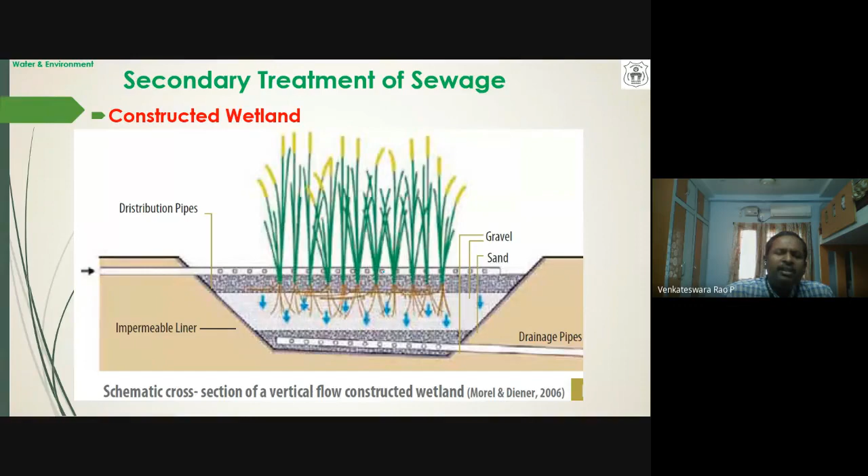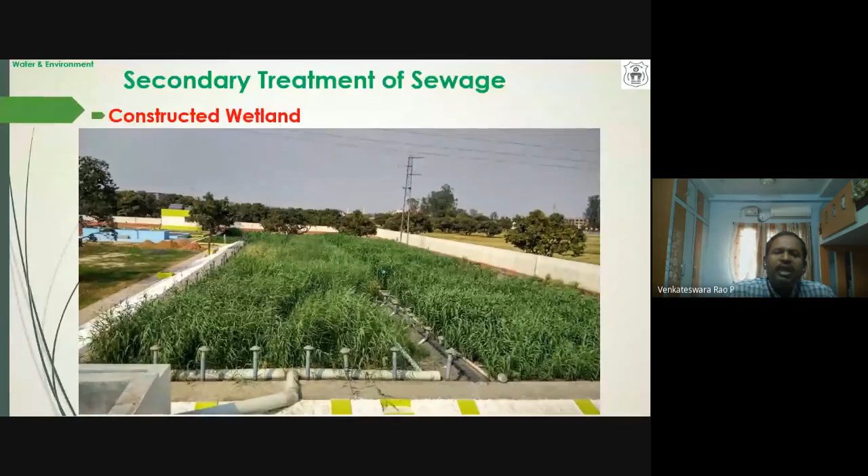Next is anaerobic digestion. All systems shown so far are basically aerobic digestion. Now coming to anaerobic digestion, organic matter in the absence of oxygen is converted by different microorganisms into methane plus CO2. This mixture is called biogas.

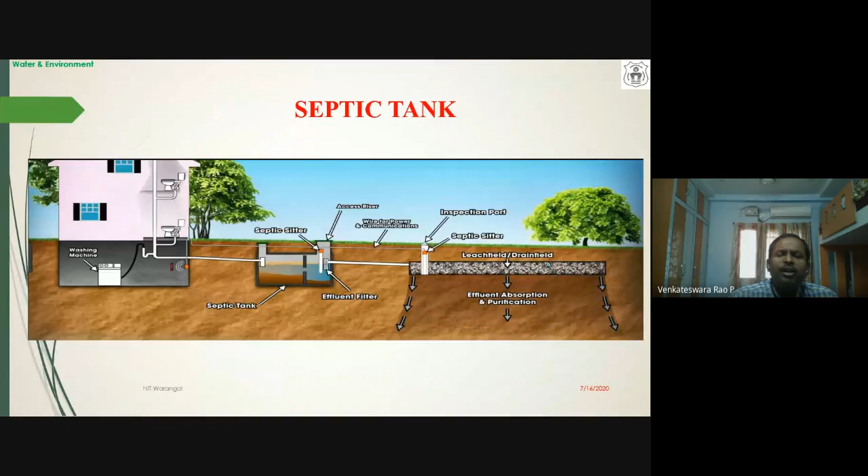There are different systems available like anaerobic ponds, septic tanks, IMHOFF tanks, standard rate anaerobic digesters, anaerobic contact process, filters, UASB, and fluidized bed reactors. Anaerobic ponds are like waste stabilization ponds but with much higher depth; that's the only difference, it's a class of waste stabilization pond. Septic tanks need no introduction, found in almost every house where conventional municipal sewer is unavailable.

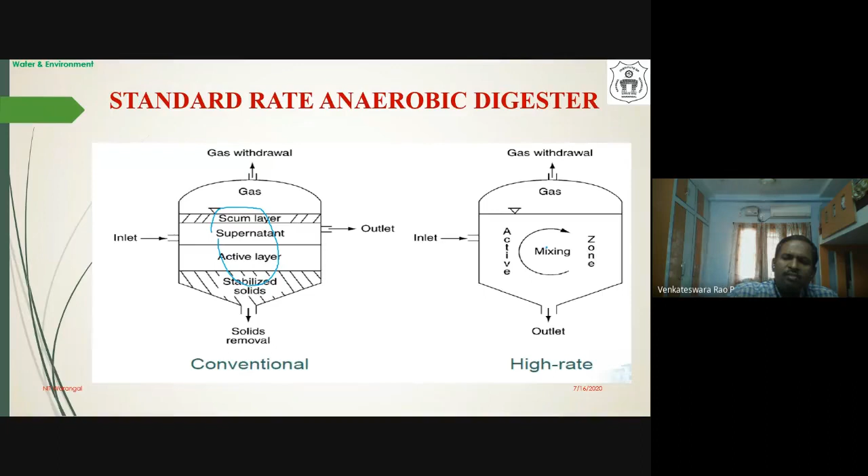IMHOFF tanks were the older versions of septic tanks, along with standard rate and high rate anaerobic digesters. In standard rate anaerobic digesters, there is no mixing, so very little energy is used. But in high rate digesters, we mix different batches of the waste being fed, thereby improving microbial activity so food reaches all microorganisms more effectively. That is called high rate anaerobic digesters.

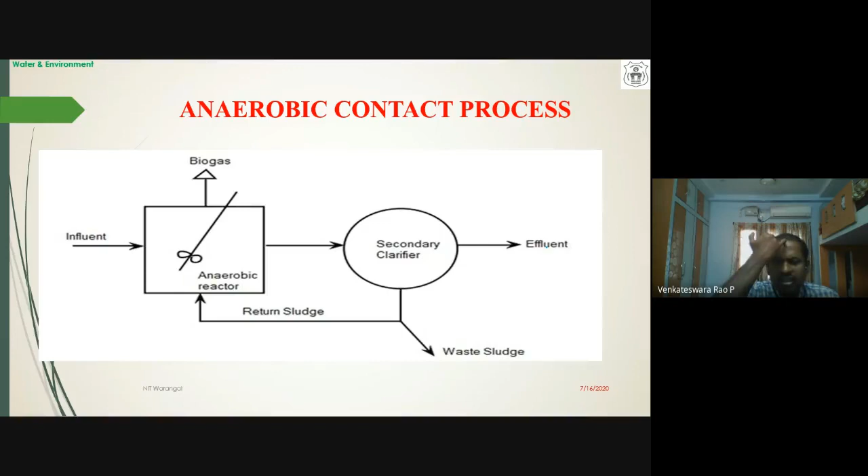Next is anaerobic contact process, which is very similar to contact stabilization in aerobic process, a modified version of ASP. Instead of supplying aeration or air, we allow it to react, thereby producing biogas. That is called anaerobic contact process.

Anaerobic filter is an improved version of anaerobic contact process, with different filter units that facilitate effective interaction between the food and microorganisms, thereby removing organic matter.

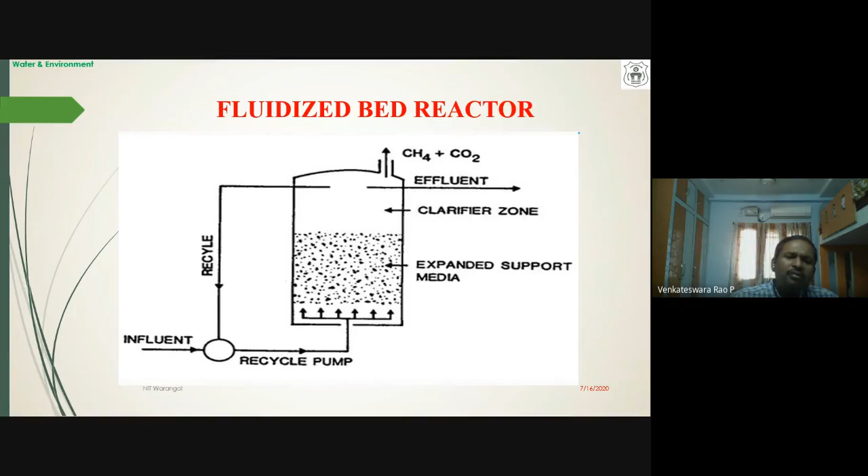Fluidized bed reactor is another type of reactor. For example, in a UASB reactor, the sludge blanket maintained at the bottom is expanded when wastewater flows through, and the micro granules are exposed to high concentrations of wastewater impurities, so the organic matter can be quickly fixed. That is called a fluidized bed reactor.

From all these systems, we can conclude that aerobic systems require more energy to operate, and the energy produced in aerobic systems cannot be tapped; they also require a smaller footprint. Whereas anaerobic systems require very little energy to operate, but are capable of producing more energy, and they also produce very little sludge.

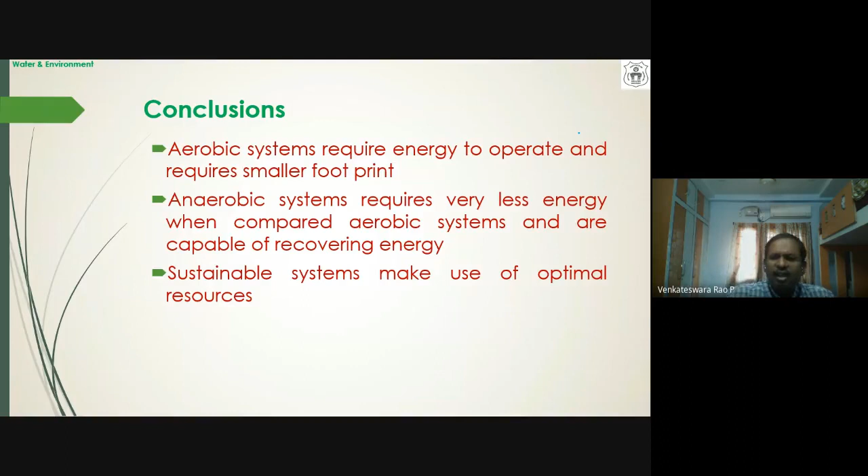These sustainable systems make use of optimal resources in terms of energy usage and good quality effluent, so that they can be used better and be environmentally friendly. These are the conclusions, and now the floor is open for discussion.

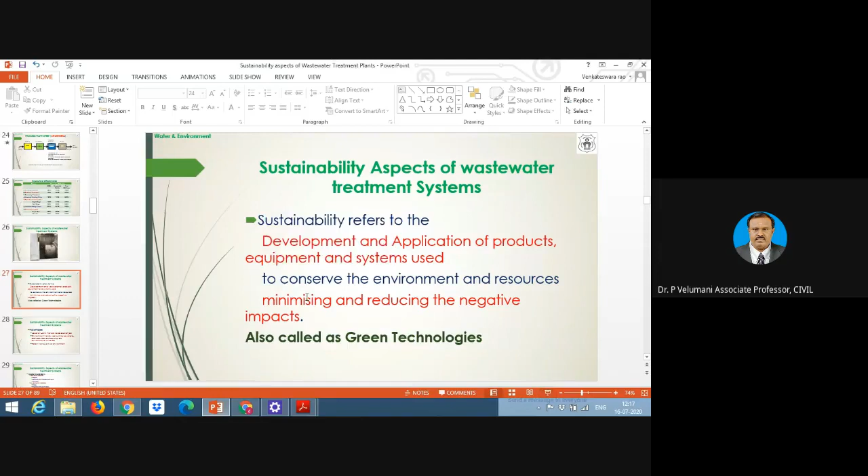Question: is there a technique available for converting seawater to drinking water, like Gulf countries use? If you want to convert seawater to drinking water, the only thing is reverse osmosis. Salts are soluble and require much more osmotic pressure to remove, so they have better bonding with water. That's why you can't easily remove any of these through biological measures. You have to use reverse osmosis; that is the only method which can treat seawater.

Yes, converting seawater into drinking water is possible through reverse osmosis.

Participants can float queries in the chat window. Question: can treated water be used for generation of electricity? Treated water can be used for reuse because you are getting around 1 million liters a day. For example, the Hyderabad Amberpet plant gets around 350 MLD capacity. If you want to produce electricity from that, how will you do it? It is literally impossible to produce electricity from treated water.